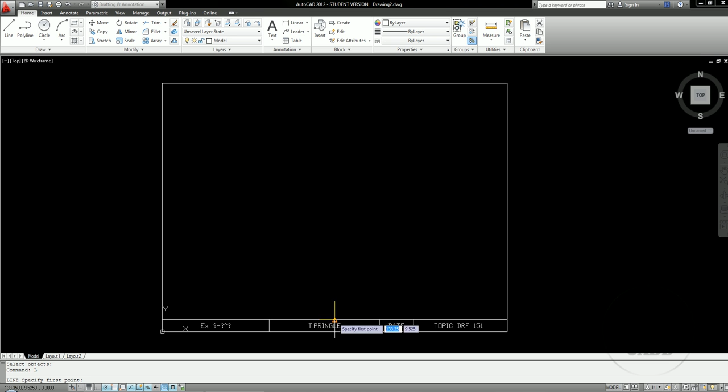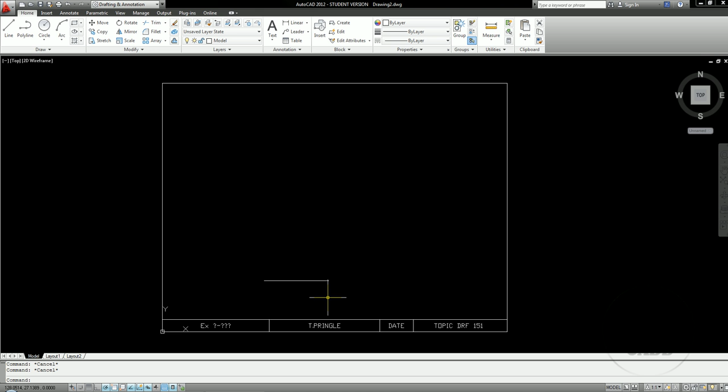So I'm going to draw a line that goes over 50 that is then going to come up. We're not quite sure how far it comes up because it's at a 30-degree angle. So there's a lot of layout required for this particular drawing. What I'm going to do is I'm going to first just go up 23. I know that there's going to be the additional piece sticking up from here, but this is going to give me the easiest way to go ahead and do this.

And then I can go over 15, and that's going to give me my angle right here. I'm going to come over here and I'm going to go up over an additional 20 so that I can get my right edge. The total height of this object is 55. So I've gone up so far 23. What I'm going to do is I'm just going to go up the total 55. What that's going to do is give me a line over top of a line, which isn't really a big deal, but I'm going to go ahead and erase the line underneath.

And then this line is going to come over this way 25. And then this will come down at a 45-degree angle, so I'm going to tab 45, tab back, and just draw that down at that 45-degree angle. I can do an angular dimension to verify that it's done at 45 degrees, but you don't really have to. Now I can draw this line up to here and trim this piece here out.

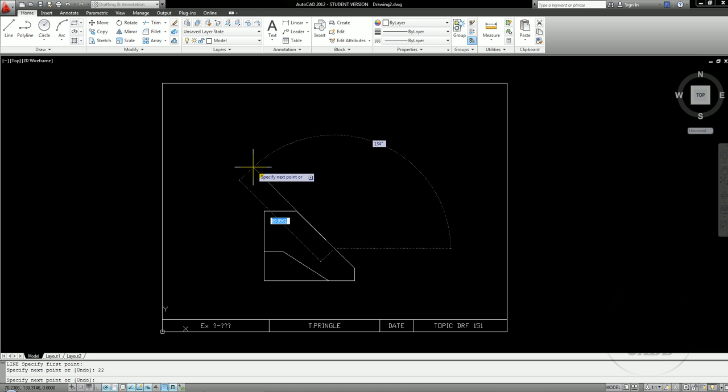As far as the dimensions are concerned for this direction, I know that this thing is going to go up 22 before it starts that cutout, but to make this easier for me, what I'm going to do is I'm going to draw a line, and I'm going to line it up on here and type in 135 degrees for my angle, and then type 22 for my distance. And then 15, tab 135. What that does is that gives me both locations, so now I can come down from here 15 and then go over to where it would project to the other side.

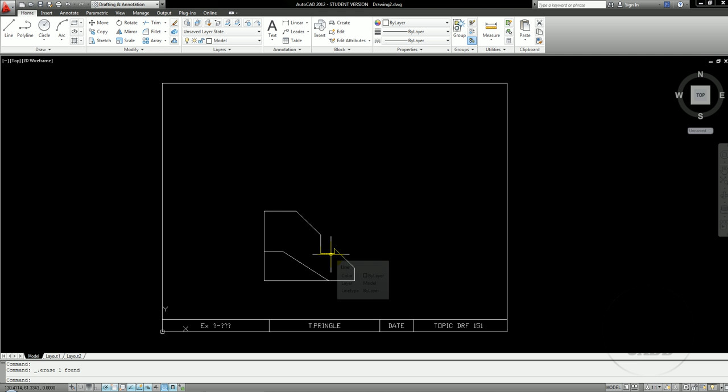And since I have lines over top of lines, I'm going to go ahead and get rid of some of the lines that are overlapping. Now this seems like a pretty complicated set of things to do, but it's really not that bad if you just take it one step at a time. Now, I do know that I have a 30-degree angle over here, but that's going to be easier for me to get from the right side view, so that's the view that I'm actually going to pick it from.

So the first thing I'm going to do is I'm going to go ahead and draw my 25 by 25 box. And now I can begin to draw my right side view. So I'm just going to start at the very bottom, and I'm going to draw a line to the right 50. It's going to come up 55, then it's going to come over 15.

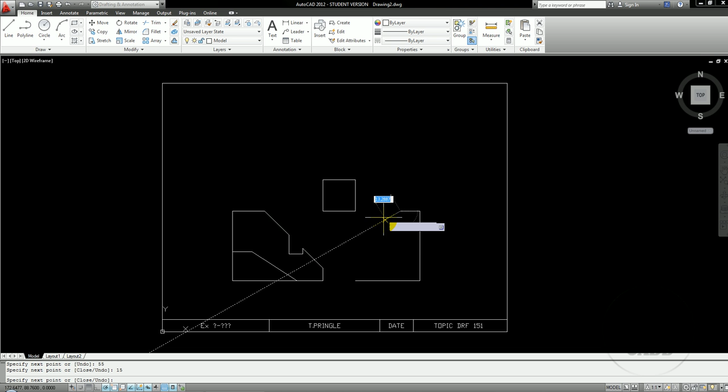And now at this point I'm going down 30 degrees. So that's going to be 150 degrees, which is what my snap is set at, but if your snap is not set at that, just hit tab 150, tab back to your distance, and then you can come and bring that over as far as you want.

Now I have the point at which these two pieces intersect, which is going to be vital because that is where that top rectangle actually ends for this piece over here. So now I can get this section in and erase this line that was only placed there as a guide for what I was doing. And then I can draw in that 30-degree angled face right here.

Now I do need to know where this comes in, so I'm going to project a line from here over to here, and that's going to come back this way 35 and then go straight down. I have another line right here which is going to be projected from here straight over. So now you can see I've got this angled surface, this flat surface, and now I'm working on this angled surface.

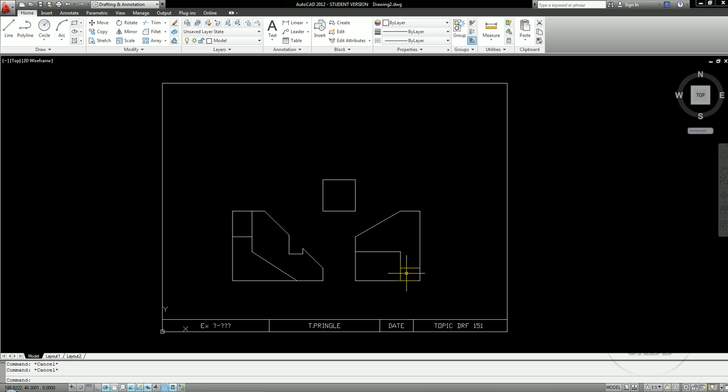So I want to bring a line pretty much all the way up from here, because we're now looking completely at that angled face. So now we'll bring a line from here, project it over, from here, project it over. So now we see our flat edge, our angled face, the back side of the flat edge, and our next angled face.

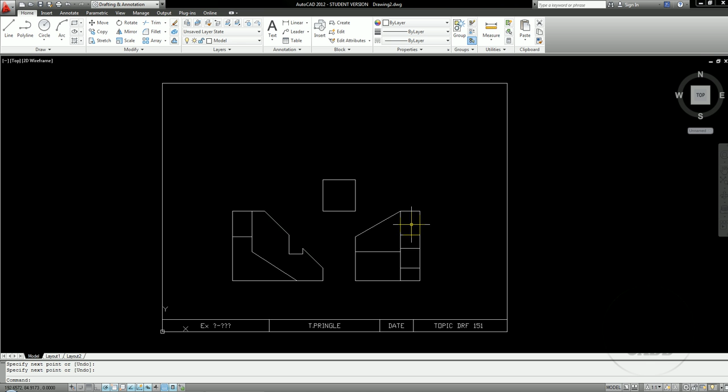If I switch over to my hidden layer real quick and draw another line representing the bottom edge of this, that's going to give me that hidden line, and I'll go back to model since that's pretty much the only hidden line in this entire drawing file.

Now I'm ready to begin the top view, but first I'm going to verify. Looking at the front, I've got my angled face, my wedge shape, and then this funky shape right here. For my right side, I've got this rectangle, this shape, my flat edge, my angled face, flat edge, angled face, and the hidden line to represent. Okay, so I know that I've got all of my lines in.

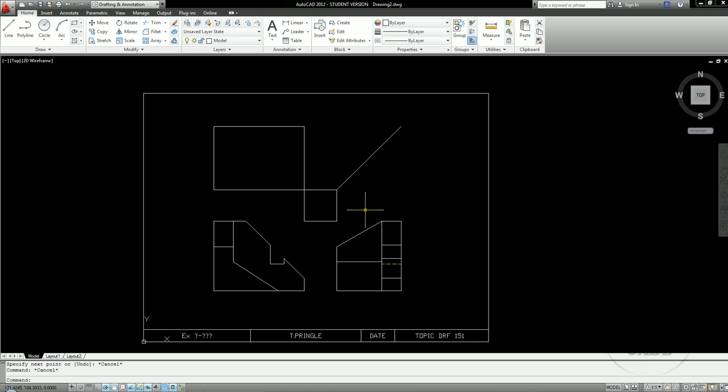Next, I'm going to go ahead and just draw a box, which will do -70, 50, which gives me the rough overall shape of the top of my object. I can then come in here and put in my miter line so that I can project whatever dimensions or anything that I need to project. For this particular object, though, it may be just as easy to go ahead and lay stuff out dimensionally.

For example, if I come off of here 25 and then come over 15, I can bring that now all the way to that edge. I can then project from here, and now I have my angled surface for that portion. I can now project this edge up, and that's going to come to right here and connect back into here.

We then have the rest of our angled face right here, which means that this piece right here does not actually exist, it's not visible. And then I can draw the remainder of my object, which is this groove right here, in this part. So from my top surface, I see this rectangle, this rectangle, this rectangle, this angled face, the bottom of my cutout, and this rectangle.

So again, taking these objects one simple piece at a time is going to greatly help you to actually arrive at the result that you're looking for. Again, this still needs to be centered, it still needs to be dimensioned, but that is the basic process for developing exercise 5-16.